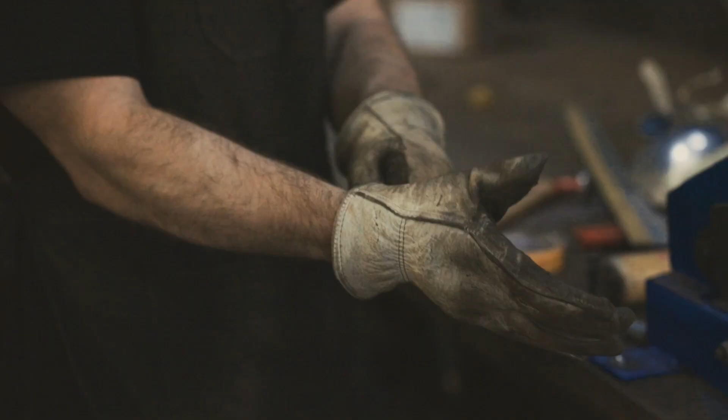Probably can't tell what it is. A few people have actually seen it and tried taking a guess, and it's not a DeLorean. No part of this is a DeLorean. It's actually a Lancia Monte Carlo.

So this was completely stripped and dipped, and it has brought out some of the bad work that has been done in the past. So basically I need to make two new rear quarters for this - door skins, sills, front wings, and a few other bits including floors. Basically someone else had a go at it before and hasn't really gone at it in the right way. But that's what I'm here for, I think, so people tell me.

And I'm gonna correct all those bits up, as well as all the surface rusted areas where they've grown a bit thin and kind of need correcting along the way. So lots of little bits and some huge bits need doing to this. And I'll show you the progress as we go.

So first of all, I'll show you the rear quarters and what we're gonna do there. As you can see, there's a lot of white pen marks all over the place - they're basically areas that need attention. This rear quarter needs a lot of work, with a lot of distortion in here from where it's been welded.

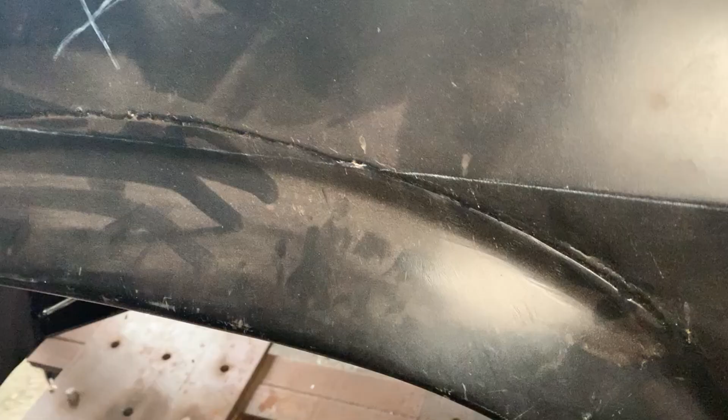It's taken up too much heat, or the actual welds have shrunk and then distorted the rest of the quarter. Lots of bits where someone's had a go at them before and it just hasn't turned out very good. And the way this arch has been put on is just no good, especially how shot the inside is. So that all needs taking off and the inside repairing too.

So I'm gonna need to take a good reference of what this quarter is. Difficult to find them - I can't find one, so what we're going to do is make one. Might seem like a big old job, a big chunk of metal to move, but if we do it step by step, attack it in small steps and address the issue one by one, I reckon we'll get there.

So what I'm going to be doing now is get the process of 3D scanning this whole rear quarter so we can take all the references we need, and then I can actually design the buck in CAD so that I can take out all these divots, smooth it out, get the radiuses right so we know they're in the right place, ready for a good reference for the buck to be made and the panel to then be created on top of that.

I should be able to draw up a template for the blank of that as well, with all the reference marks along the way where the folds need to be, and even potentially make some of the tooling for some of the hammered edges and some of the die forming, so I can run these beads to be the right step by actually slicing the panel and putting it through the power hammer parallel with an edge so that it is smooth and everything lines up all the way through.

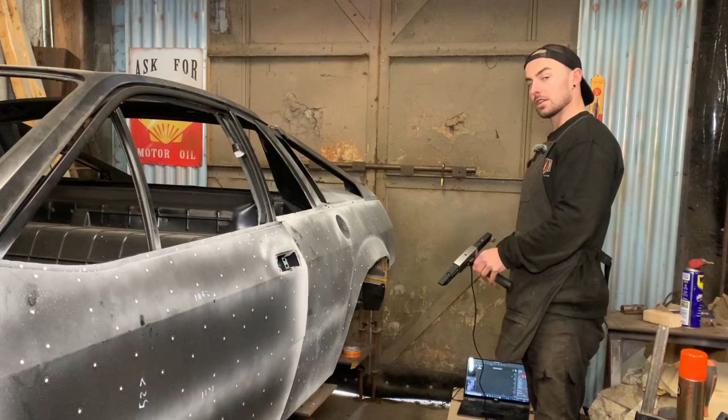So you can see, got my laptop set up out of the way here. This is my 3D scanner. It's nothing over the top.

Let me just untangle that. I'm just going to basically scan the rear quarter. I'll then open up the door so I can get in all of the shut, and then that is going to be converted on the laptop to get all the references I need from it. But you might just be able to see out a shot here, the actual scanning process of what happens when we do it. Let's go.

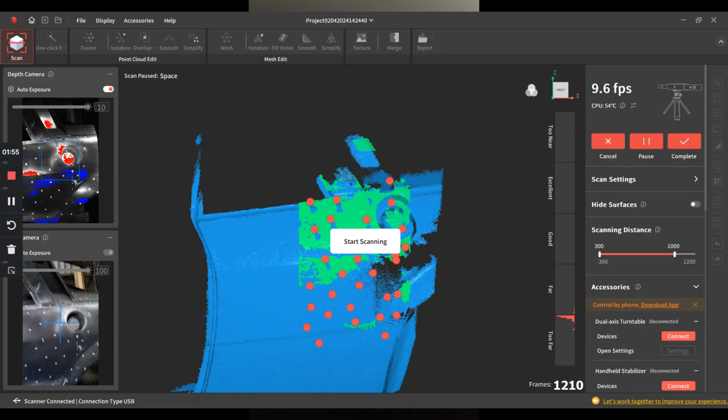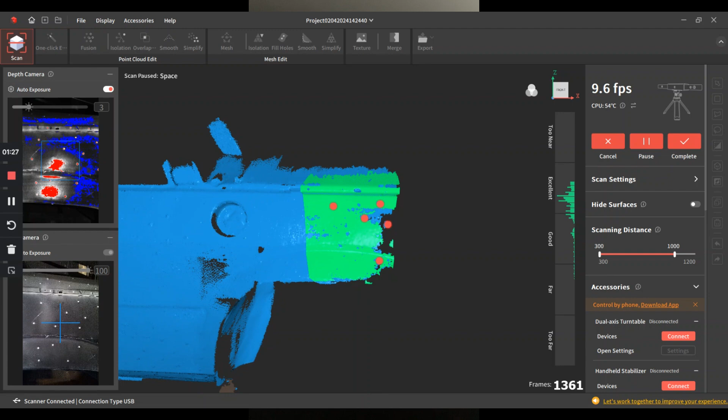Okay, so here we go. We're actually scanning the panel now. So you'll actually see all these little reference dots that are appearing, and those are those little stickers we put down there. They are crucial to have in place because it means that we can actually get the scanner to track whereabouts on the panel it is, and the more random they are, the better. If we didn't have them, it would basically follow parallel lines and it would shoot off. It wouldn't be able to stay still or know whereabouts on the panel it is.

But also you can see where the scanning spray is and where it isn't, because we're getting some of these darker zones appear. And the main thing is to go back over those, because we've got those reference dots, it can actually fill in the spaces, which is really helpful because we want as much data as we can possibly get.

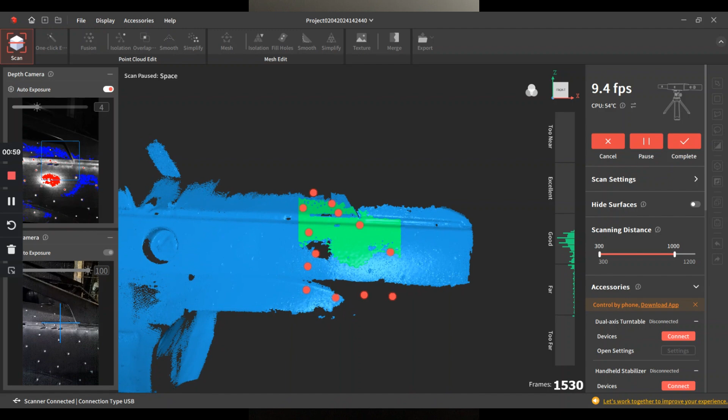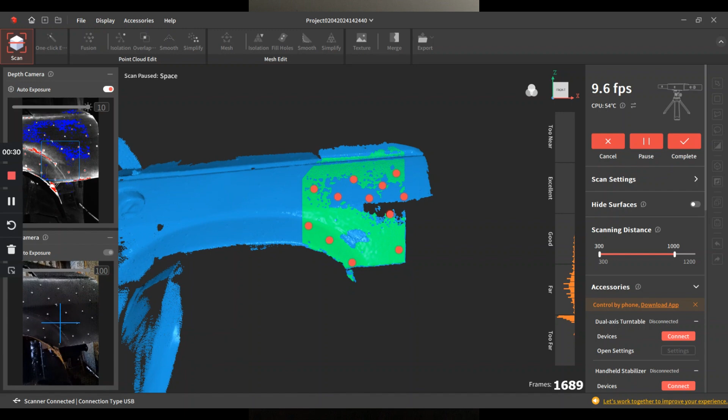So I'm going to keep working back and forth now and make sure I do get all these reference points, all these details that I want to carry over to the buck and get it as accurate as possible. Because we're going to be using this as the reference straight onto the buck, we need to carry over all those details. So I need return edges, the arch flare out, even how it wraps around the rear, how it joins to the boot floor. Even the depth of the arch, so I can actually have that as reference on the buck. I'll even be copying some of the bead lines from this if I can't just copy them off the car.

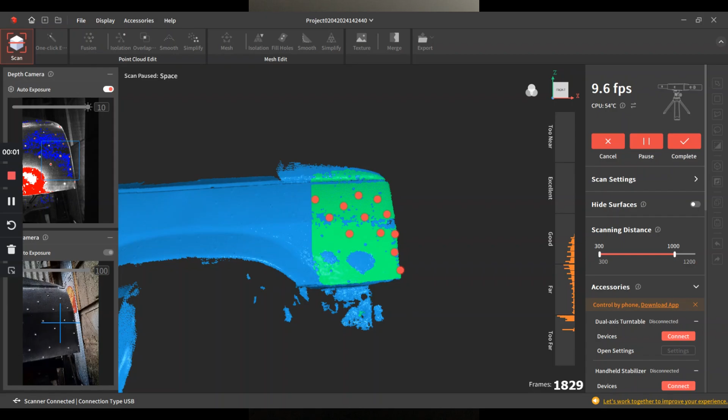But now I'm going to put it through the software. Let's make it a solid form and start to make all the buck form and all the slices to go together. Now that we've got all the slices together, you can really see how it all joins up and what the final buck is going to look like.

We've already got the thickness and the tolerances of how the laser cutting is going to be. So we've got the cut reliefs there, but you can really see how we can use this as a gauge. So the thing I'm going to do now, I'm going to send it off to the laser cutters, and then once we get it back, it will all be in pieces and we'll get it assembled.

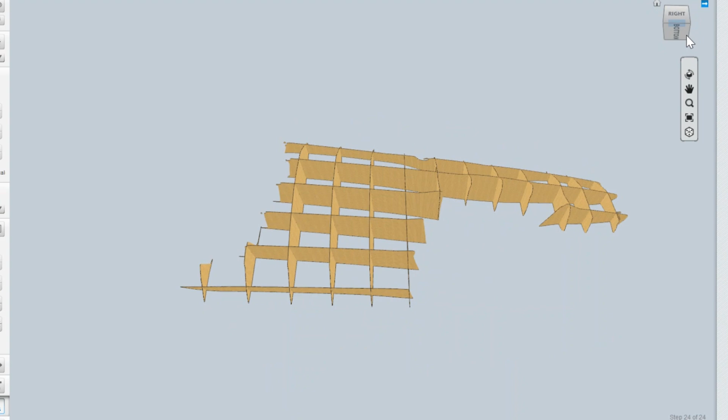And there we go, as if by magic, all the laser cutting is done. So as you can see, got it all laid out on the table, ready to start piecing the puzzle together. I do have a diagram that I can copy off of that I made in CAD with the rest of it, but I did make a little boo-boo while I was designing it all.

I basically set these up to be laser cut in 1.5 mild steel, and I did get them in 1.5 mild steel, but it didn't give me much clearance in these little slots. So I actually had all these little slots in as a 1.5 gap between the edges, and it was just literally bang on for the thickness of the material, made it a bit too difficult for them to slide in together. And I don't want them binding up, because if they bind up, they will tend to flex and deflect the other way.

So I've just zipped through them with an angle grinder, opened them up that tiny bit more so that it will all slide together nicely, hit into the backstops, and yeah, then it will start to take shape. And I know that I can then probably pull, well, I'm hoping I can pull it all apart and then flip it over to make the other side of the car.

So it's all symmetrical. All the references will be the same for the other side, and it'll just be a case of I will number them all now once it's all together, so that I know where it all goes afterwards and I haven't got to do the whole head scratching all over again. So yeah, really happy I managed to get all this out in CAD. Been trying to figure this out for a while, little achievement for myself, but I won't speak too soon because it's not together yet, so let's go.

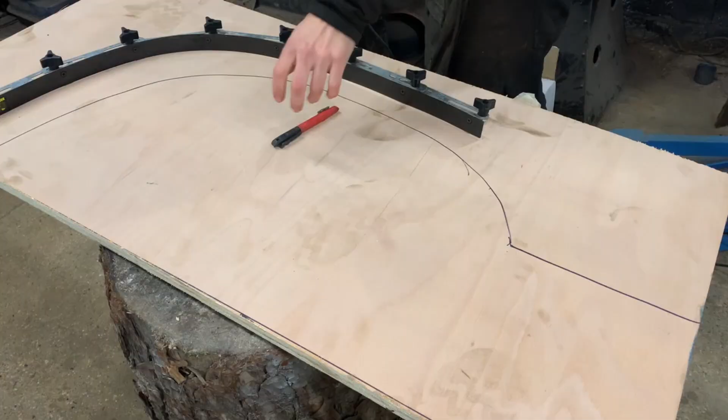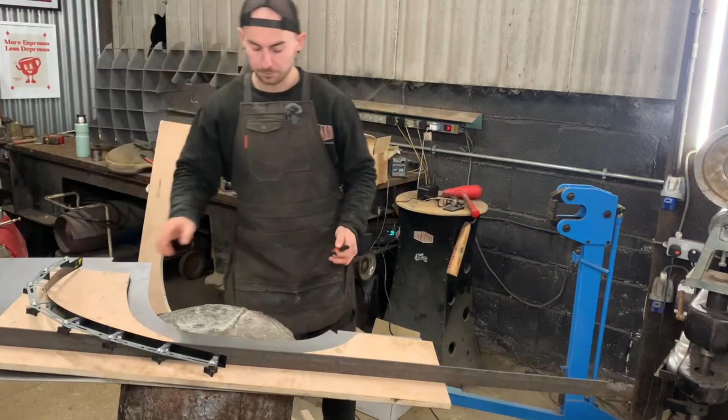Right, now I've actually cut out the two wooden forms I'm going to need to dress that top line of the arch, and I've done this by taking a radius measurement from the buck of what the arch line is. So this is the outer arch line, and I've got the two pieces here. I've marked up the panel, and what I'm going to do now is apply a load of stretch to where the arch is going to flare out. I'm going to do that over on the Pels machine.

So by using the power hammer into a hockey puck, it's going to add a lot of stretch to the outer edge of the arch to then bring the whole thing out. We're just aiming for some stretch going into this, not actually aiming to get any shape just yet, mainly focusing on the stretch to get the material to be the right size to actually play with. So I'll take all this off and then I'll move over there.

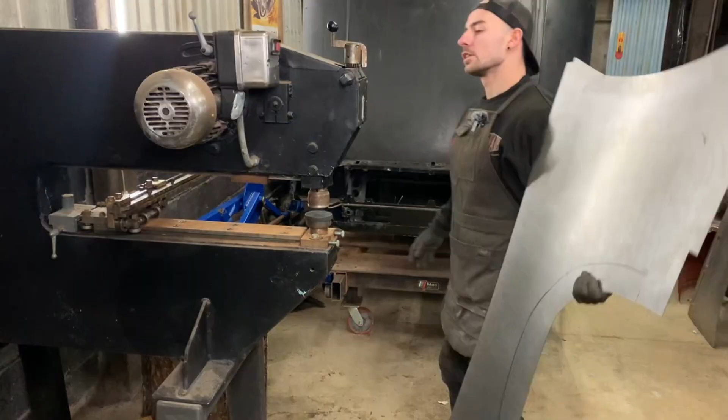So now over onto the Pels machine here, and here's the panel. You can see probably some of the wheeling marks there, but I've marked up the line on the inside of the panel where the top of the arch line is. This is so that I know where I'm going to work in between, because over here on the power hammer, this right here is a hockey puck, which I've got the idea of from someone else I follow.

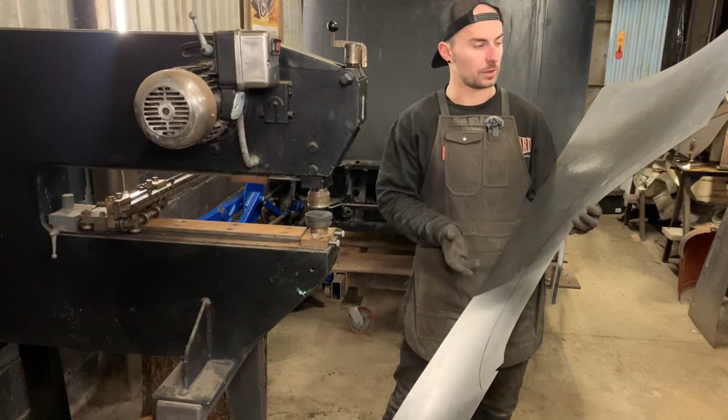Spoke to them, see if it would work in this, and it does, works quite well actually. All that is, instead of having to beat into the sandbag and basically put stretch in, I can just do it on this. Again, like I say, I'm only trying to stretch the material. I'm not trying to get shape into it or the final form just by this. I'm going to be finishing the rest off by hand ideally, but this is just to move the material so I've got something to work with.

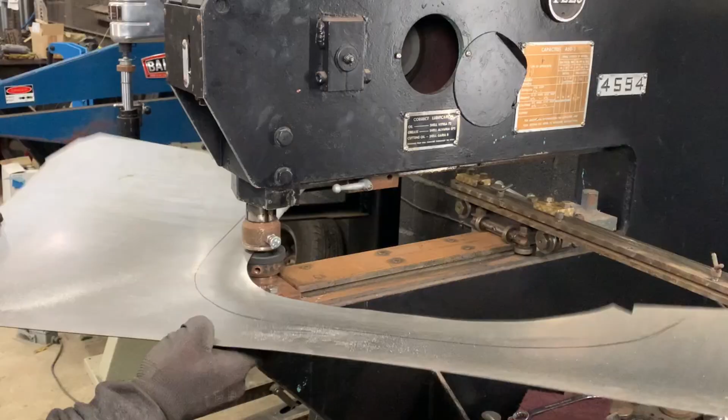So I'm going to get it in there, all freehand. I won't be using any of the tracking to line up, just got to stay within the lines, you know, how I practiced with my crayons when I was growing up. Start stretching it out, and then you'll slowly see the form come together. It will start to bow the whole panel, but that is just so that we can get it to the right shape, and it will end up straightening itself out once we got the final form and shape into the arch. Right, let's get it in there.

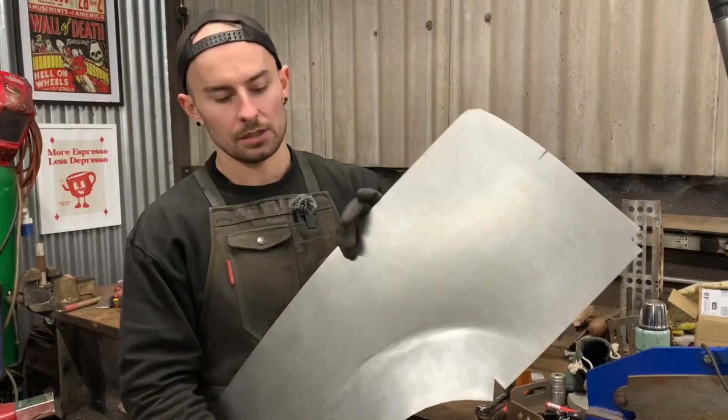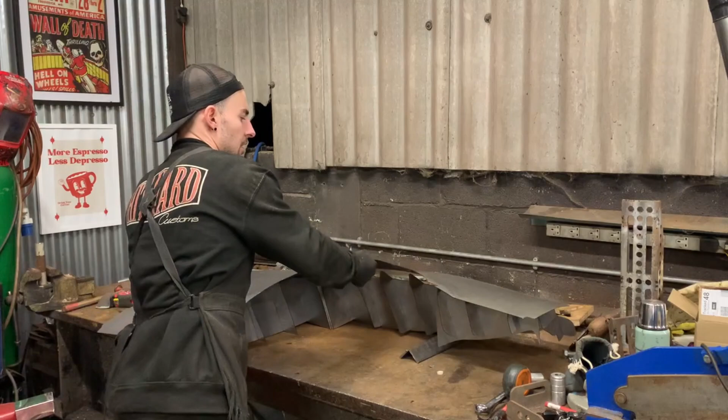Now you can see after doing all the stretching on the power hammer there, it's actually flared the arch out where it's going to be, moved the material, so we've got plenty to work with there. What I'm now going to do is test it onto the buck to see if it all lines up. And after a few goes back and forth, I have checked it against it. This isn't a first time thing. It looks like it is all starting to fit together quite nicely. So basically where that line is dropping into the vertical stations, it's fitting very well.

So what I'm going to have to do now is, as you can see, you can't really see an edge to where the arch is. So where that line is on the back is actually where the top edge of the arch should be.

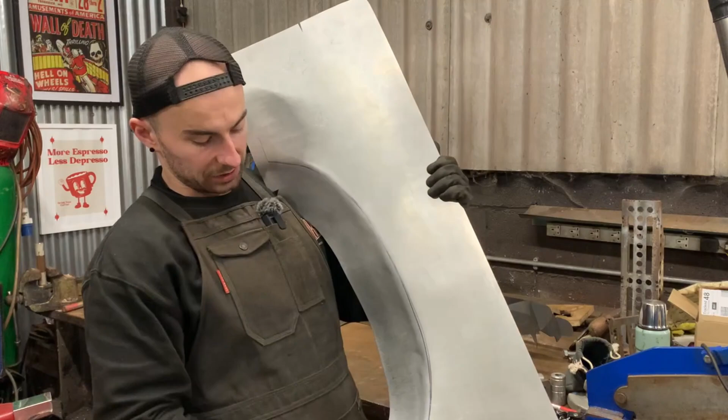I'm actually going to put this back in those wooden formers I cut earlier, so it's sandwiched between them. That means I can use the top one as a guide and the bottom one as a form, just by chasing it round. Probably best I show you so it makes more sense, but that's how we're going to get the edge back in there.

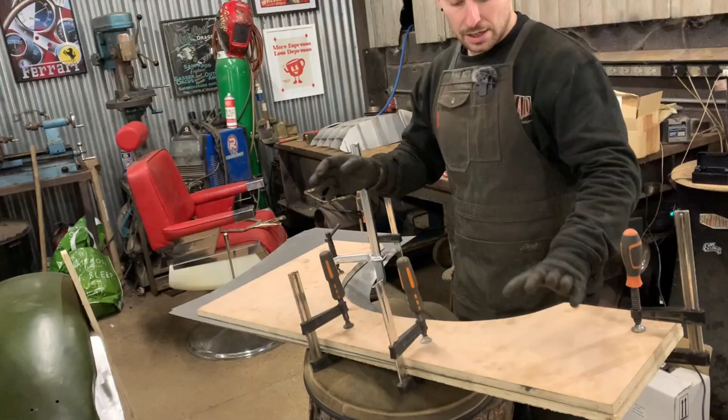Now you can see I've got the panel sandwiched between these two bits of plywood. The top one is basically a guide to where we're going to be hitting into the form below it. By holding them together, it means it won't return back on itself, so we're pushing all that material in a single direction.

That's basically where I just follow along this top edge. If you could imagine this line here, that's the same as what's underneath for the sheet metal to follow along. After that, we can manipulate the arch to where it needs to go.

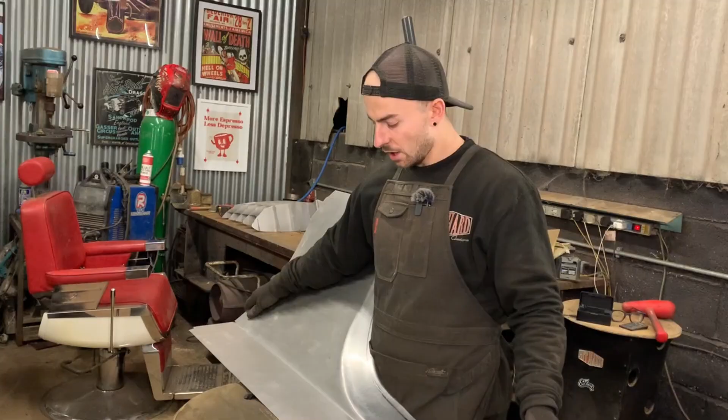But first, let's do this top edge. I've now got that edge a lot sharper for the wheel arch, and even put it in the box pan folder to fold and put a break in there for the top line.

I'm actually going to pass this through the English wheel now, to smooth out a lot of that material I moved earlier on, and actually get it shaped where it needs to be. I've also put the line in place for where the brake's going to be.

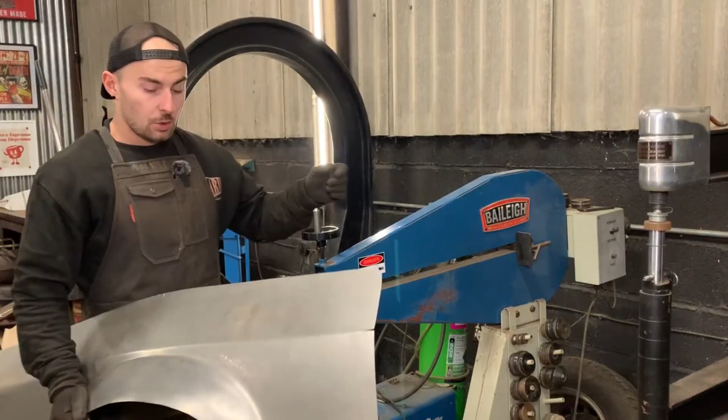That's going to be where we tip the edge on the bead roller. As some of you may have seen in a previous video, I like to set up the bead roller to basically tip a soft edge without having to gouge into it or have a really sharp edge as it goes along.

So pass it through now, just going to break it over, and then we'll move the rest over by hand.

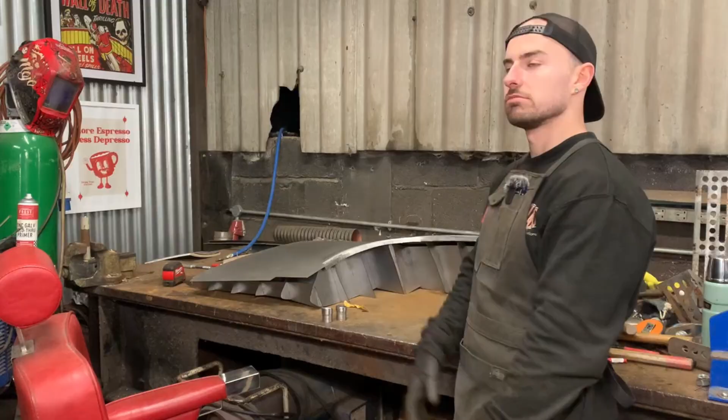Okay, right, now I've got the panel sitting on the buck with the return edge on the arch there. I've got it all sitting how I want it to. One of the next steps I'm going to do is actually put the bead in.

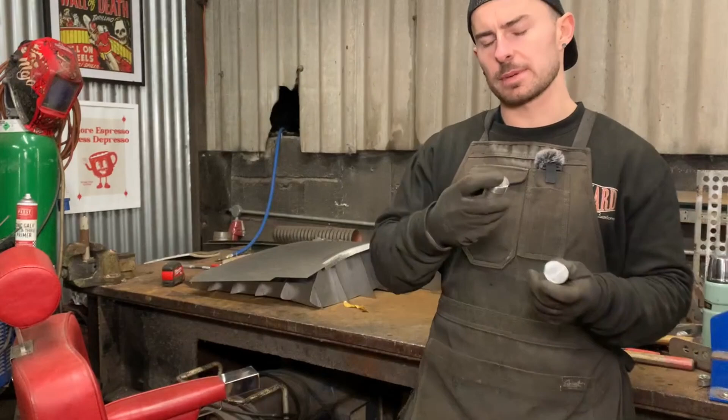There's actually a bead that goes along the center section of the quarter, and I'm going to do that with a set of dies I've made. I've made these to copy the bead that's already on there, even measured them against it and run a few test pieces to make sure it's right.

I'm going to put these in the power hammer so we can pass them through and get that little stepped edge all the way along.

Doing that bit now, because if I was to roll the lower section of this quarter first, I wouldn't be able to reach in the machine properly, because where that wraps round it would end up rotating the panel on the tracking I've got in there, or end up binding up in the machine. So doing that step now, and then we'll move to the lower section of the wing afterwards.

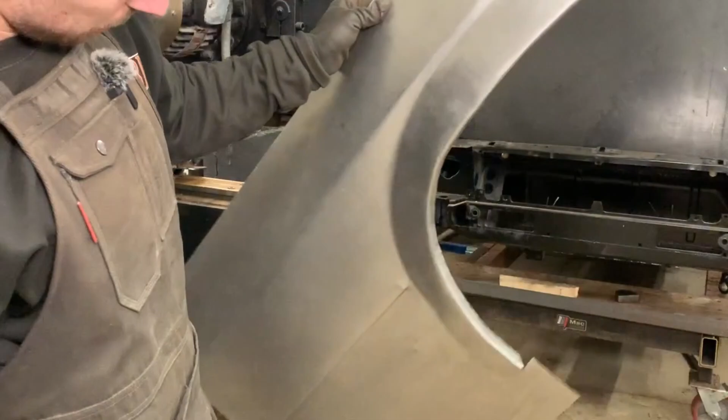Right there, that's what we're after. Coming together. This does feel so.

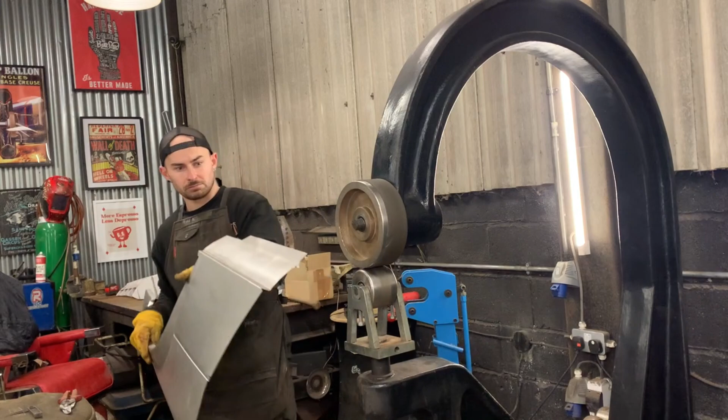Okay, so now you can really start to see the whole of the quarter really taking shape. I've moved on to the bottom edge now. As you can probably see here, I've just been in the box pan folder, done two folds. Fold it one way, flip it over, then fold it back the other. That creates a step in there. And I've also passed it through the English wheel with the band on top, which gives a bit of a radius there to basically make the sill section.

So I've got a cap off the end now. I'm going to tip over the rear section here to tie in with the rest of the arch, and that means all of this shape will be held in at the end until I move on to the door gaps to tie in the front edge. So let's move on to that.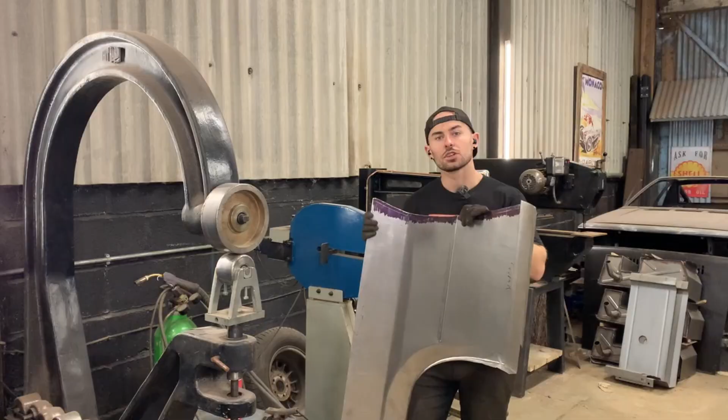So now the next step is to actually tip this inner edge here to create the door gap. This is what's going to return for the actual door shut. I'm going to tip this over on the bead roller behind me, and I've put it up against the car to scribe it and mark it against the door skin to make sure they are the right radiuses. Now it's time to put it in the bead roller, knock this edge over, and start welding on the inside. Let's go to it.

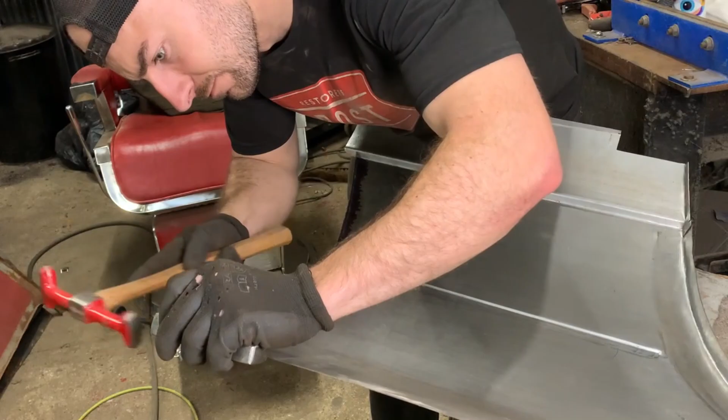Okay, so now that I've actually got the door shut line tipped over where it needs to be, I need to make the door shut itself. So this is basically what the B pillar is going to be. As you can see, it's got a curve in it that way. I've managed to step an edge in there, and I've also done a little impression there with a little tool I made that I just put into the hydraulic press.

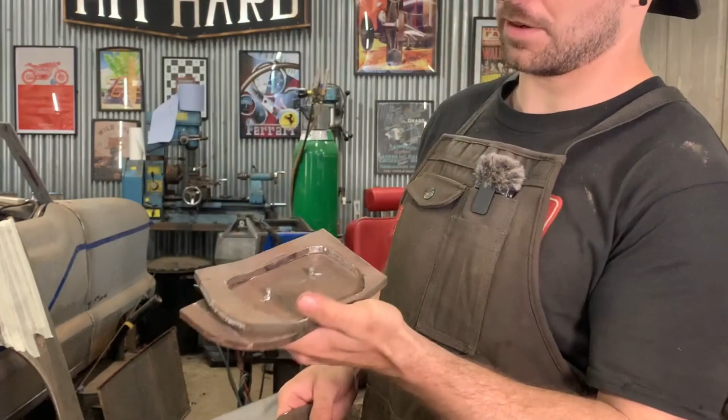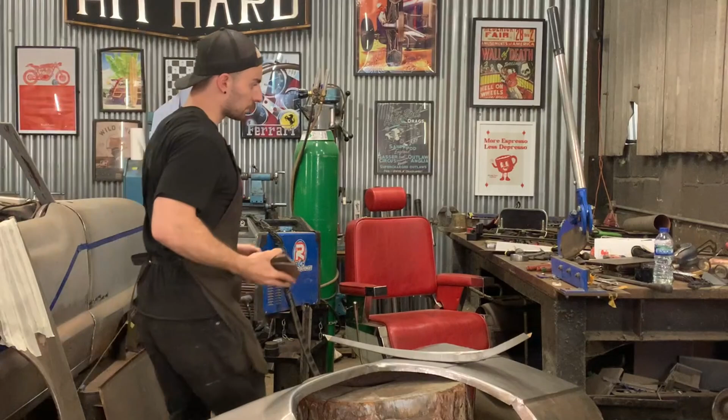I'll come over to the camera and show you a bit better. So basically just a couple of scrap bits of plate. I've cut those out, and that bit goes in the middle. All it does is line up with the actual bolt holes for the latch to go in there, and that bit just drops down in there, and you'll see that kick up matches what's on the actual door shut, and this flat section is where the latch is going to go. So now that I've got that made up, I need to weld it in place, so I'll move on to that now.

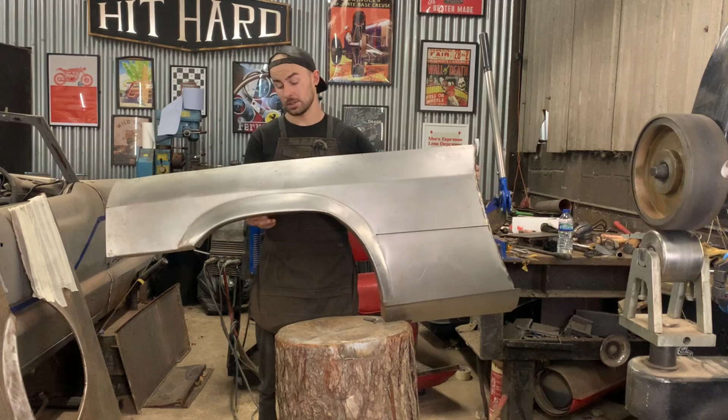Okay, so now I've actually got that all welded in place, as you can see there, and I think that's a good point to stop at, because I think we can say that's a rear quarter panel. A lot has gone into making this, as you've seen, not just the designing of this, but also the designing of the buck. Using the 3D scanner for that was really helpful, and you can see how they can be useful just in an everyday workshop, to design small things that on the computer you don't want to be cutting out by hand, just to get that little bit more accuracy.

I hope you've learned a lot. Using all this variety of tools definitely puts the workshop to use, because I think I've used every tool in here. It just goes to show what really goes into making something like this.

But in the next video, I will be kind of finishing off, and I've got a few other things planned for the 3D scanner. That'll actually be making some guides and tooling directly from some 3D scans, and this could be something even you could put into practice at home using some very basic tools. But I'll be tinkering about with that. I've got a couple of things in the back of my mind for it.